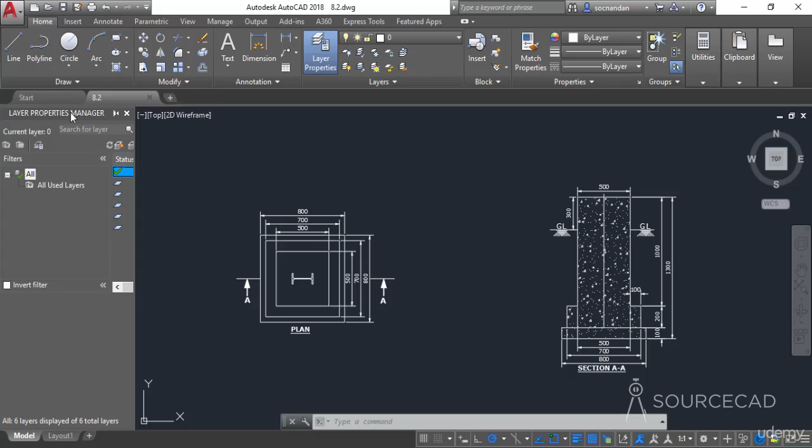This layer properties manager has a list of all the layers and their related properties. The layer which is currently active will be shown with this green check mark, and you can change the status of the currently active layer by selecting any other layer and clicking on this icon. So that will set that layer as current.

In this case we have this dim layer which is now active and set as the current layer. By simply setting any layer as the current layer, you are essentially telling AutoCAD to make any new geometries on that layer. In this case, I have set the dim layer as the current layer.

So I'll now hide this palette and make a new drawing, and this drawing will be made on the dim layer. When you click on this object, you'll notice that we have this dim here, which indicates that the current layer for this object is dim.

Even when you uncheck it, you'll notice that the dim layer is active. But if you select any other object, for example this object, the layer changes to 0, which was the active layer for this object. Similarly, if you select this text, it will change to the respective layer, which is text.

In order to make any of these layers active, you can activate that layer from this layer properties manager, simply by selecting that layer and clicking on this set current option. Or you can also make it the active layer from this drop down menu.

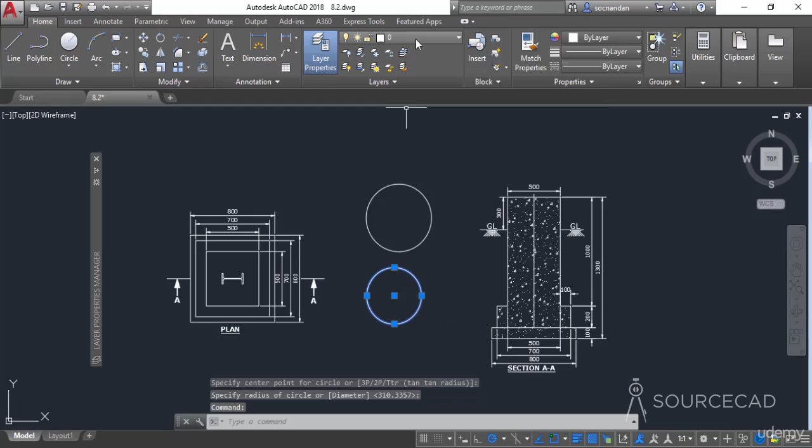So let's now erase both of these geometries and let's expand this layer properties manager. You can change multiple properties of a layer.

We'll start with the color. Here we have this color column, and all of these layers have a single color, which is white, and that's the color which we see here. Now let's say that we want to change the colors of some of these layers.

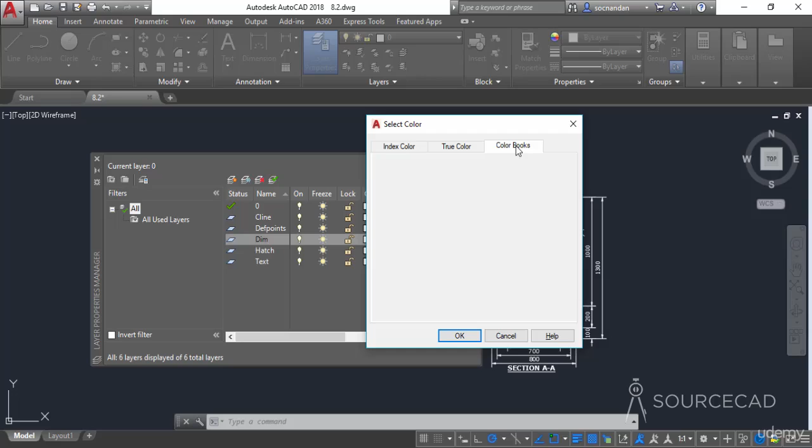I'll start with the dim layer. Let's select this color box and this will open the select color window. From this window you can select any of these colors, and if this window is not sufficient, you can select the colors from this true color option, which gives you more options, or you can use color books. For this case, I'll select index colors and I'll select this green color, and now click OK.

So the layer has been assigned the green color, and all the objects on this dim layer are now taking that property. You can directly see it in the drawing area - all of these dimensions are now colored in green.

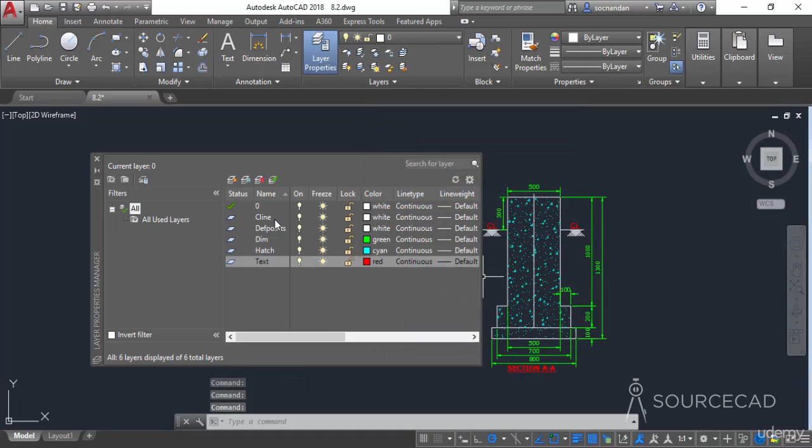Let's move to the hatch layer and we'll change its color to cyan and click OK. Similarly, we can change the color for the text layer - you can change it to red if you want, or any other color. And we have this centerline layer also - let's select it and change its color to magenta and click OK.

So in this way you can apply different colors to different layers, and that will help you in identifying these different objects in the drawing area.

Now we have some properties here like on, off, freeze, thaw, and lock, unlock. We'll have a look at that, but before that I'll simply move this palette over here and move this drawing area towards the right. Let's decrease the size of this palette also. Now we have this complete drawing in view.

So we have this on and off option, and using this on/off option you can hide some of the objects from your drawing area. For example, here we have this dimension layer.

Now if you click on this light bulb icon, it will turn off this current layer and all of the objects in that layer will hide from your drawing area. To bring it back, simply click on this bulb icon again and it's back in the drawing area.

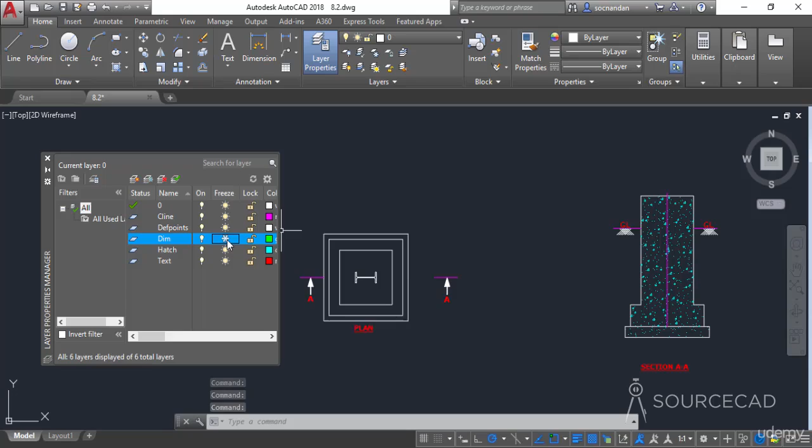Similarly, you can freeze any of these layers. So here we have an option of freezing the layers. When you click on this freeze icon, it will freeze it, and you can click on it again to thaw it or bring it back.

So visibly, on/off and freeze/thaw have the same effect on the drawings, but when you freeze your drawing, not only do the objects become invisible from the drawing area, but they also become invisible from the background processing of your PC. So when you freeze any of these layers, the objects on that layer will not be counted for regeneration, so AutoCAD will regenerate or refresh your drawings without considering those objects. That will improve the performance of your software visibly, and this is especially helpful for large drawings. So in large drawings, you can freeze the layers which are not required to improve the performance of your drawing and of your software as a whole.

So for small drawings, on/off and freeze/thaw will have no visible effect apart from hiding the objects.

Now let's have a look at this lock and unlock. Using this lock layer, you can simply lock the objects and it will become uneditable, so you won't be able to modify objects on that layer. Also, when you lock any of the layers, the objects on that layer will dim in color, and you can see that the transparency has been increased here. Now we have 50% transparency, and this small lock icon will also appear along the cursor.

The transparency of this locked layer can be controlled by this transparency slider. You can bring this slider here to restore the complete transparency, or you can move it here if you want to increase the transparency, just like this. So I'll change its transparency back to 50%, and I'll also unlock this layer.

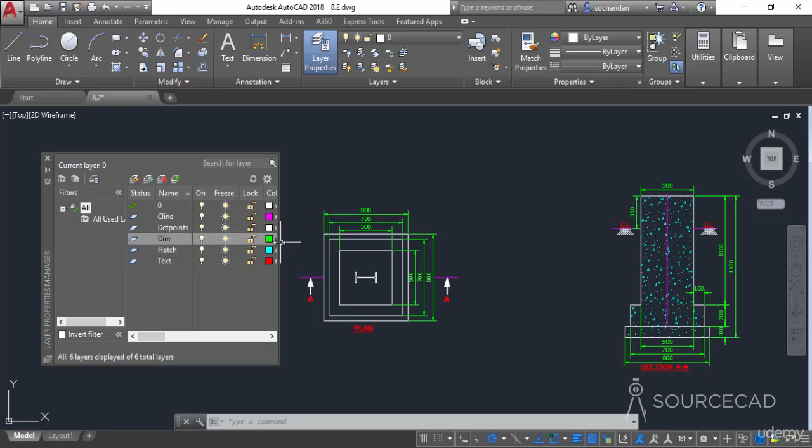And now we have this line type. So obviously you can change the line type also, but for line type, I'll select this C line layer. Now in this C line layer, we have this continuous line type. Let's click here and select this center line type instead. Now, if not many line types are loaded here in the drawing, you can simply click on this load, and you can load more line types like ISO dash, and you can use it. So let's use this center line type for this case, and I'll click on OK.

And when you look into the drawing area, you'll notice that the line type of the object on that layer will change. Similarly, you can change the line weight. So I'll change the line weight to 0.3. Click on OK, and here we have a visible result.

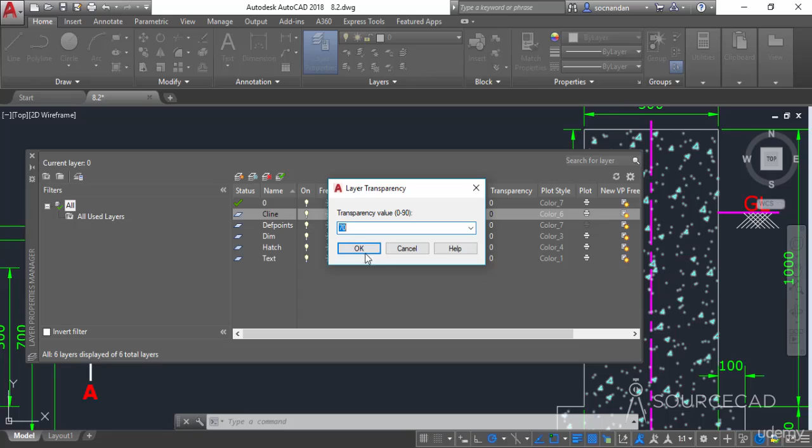And obviously, you can change the transparency. So the value of transparency will range from 0 to 90, and you can change it to any value which you want. So I'll select 70 and click on OK. And here we have it, the transparency has been reduced.

In case of line weight and transparency, you need to ensure that this line weight display and this transparency display status bar options are active in order to see its effect. So if you turn off this line weight display, obviously the line weight will not be visible. Similarly, if you turn off this transparency option, the transparency will not be visible. So make sure that these options are active.

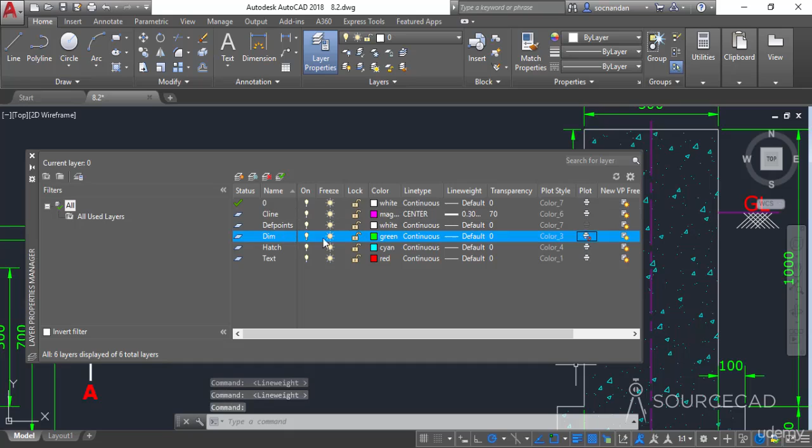There is also an option of this plot. Now, when you turn off the plot for any of these layers, the objects will not be plotted. For example, I'll turn off the plot for this dim layer, which contains this green object, or the dimensions. So let's zoom out and decrease the size of this palette.

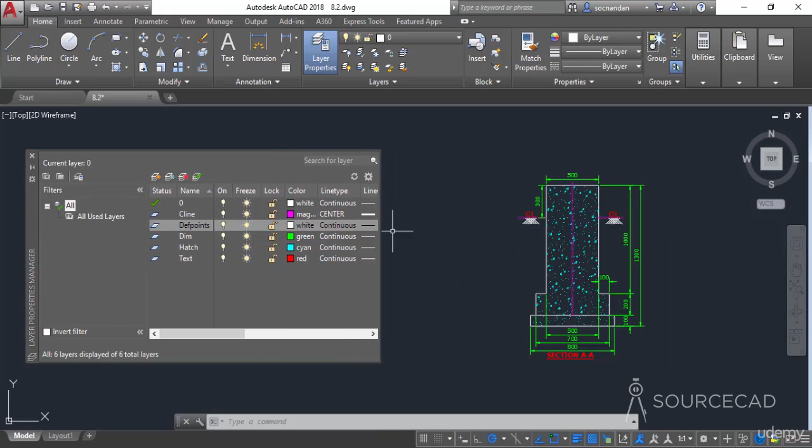Now, all of these dimensions will not appear when you plot your drawing, whether you print it on paper or take the output as a PDF file, it will not appear. To make it visible, you need to ensure that the plot is on. The Defpoints layer will always have this plot turned off by default, and you cannot change this value. So let's decrease the size of this palette, and that was all about the Layer Properties Manager palette.